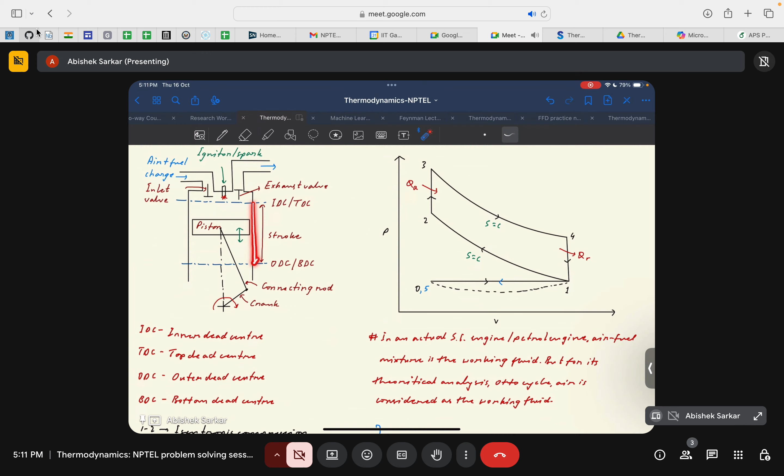And the piston usually travels between these two centers, that is between the inner dead center and the outer dead center. The piston's to and fro motion is limited between these two points. And the distance between which this piston moves, between the inner dead center and outer dead center, is known as the stroke of the piston.

I hope the schematic diagram of the engine is clear. Should I repeat it, or is there any doubt in this diagram?

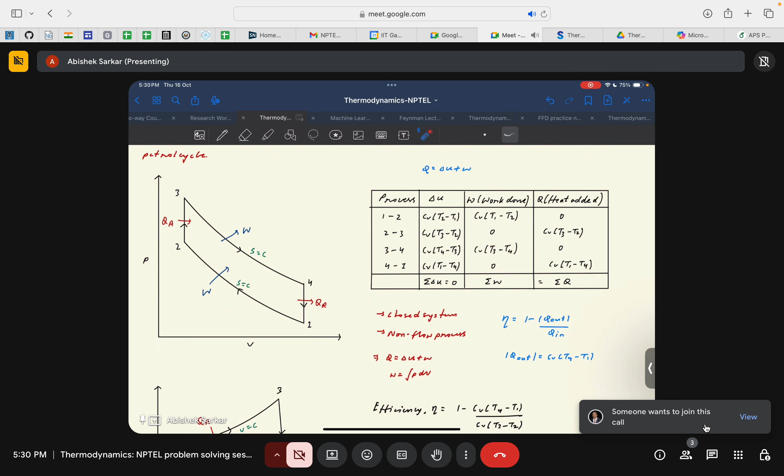Now if you just see, the summation of the change in internal energy, delta U, for all these processes will be equal to 0, and the summation of work done will be equal to the summation of the heat interaction. This is because this is a thermodynamic cycle.

So now we look at how to find the efficiency of this Otto cycle. If you recall, we again take the aid of the general formula of efficiency.

So we take the general formula, that is eta equals 1 minus Q out by Q in. Q out is the magnitude of the heat rejected. I think you already know this, so I don't have to dive deep into it again.

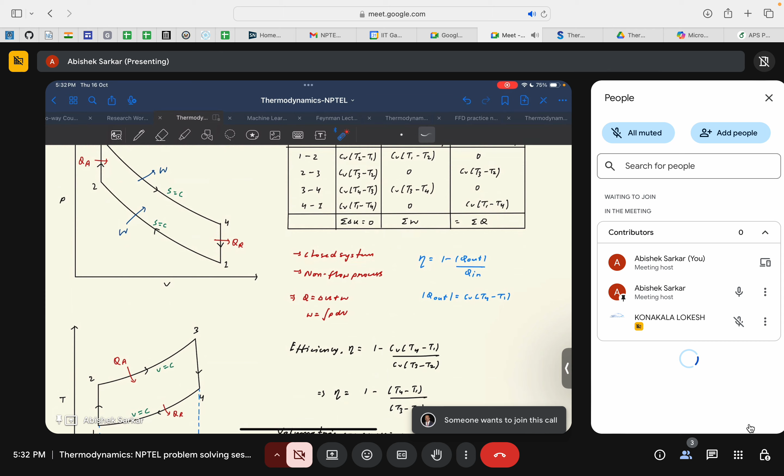So by now you will see that the Q out in this case would be Cv times T1 minus T4. The Q out will be heat rejection, so heat rejection would be Cv times T1 minus T4, and heat addition would be Cv times T3 minus T2.

So here I have written Q rejected to be Cv times T1 minus T4, but this is like the formula of initial minus final. If you just check the magnitude, because T4 is higher than T1, and we are taking the magnitude of the heat rejection, we will take the negative of this, so it becomes Cv times T4 minus T1.

So we will have efficiency eta as 1 minus Cv times T4 minus T1 divided by Cv times T3 minus T2, that is the heat added. Here again T3 is greater than T2, so that's fine. So Cv will get cancelled out, and we'll have eta as 1 minus T4 minus T1 divided by T3 minus T2. So is it clear till now?

Okay, so if you recall, in the previous lecture when we discussed the Brayton cycle, we specified that the efficiency was measured in terms of a parameter known as the pressure ratio, Rp. Similarly, in the case of the Otto cycle, we define the thermal efficiency in terms of a parameter known as the volumetric compression ratio.

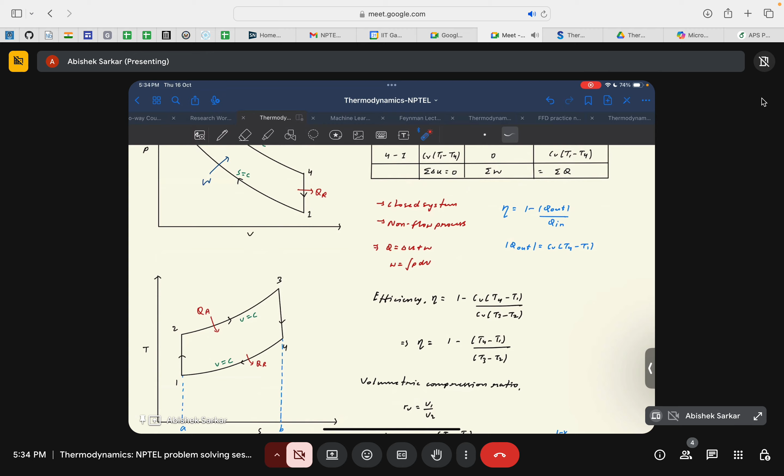As Lokesh rightly pointed out, this is the ratio of the volume at the outer dead center divided by the volume at the inner dead center. So we define RV, the volumetric compression ratio, as V1 divided by V2, where V1 is the volume at the outer dead center and V2 is the volume at the inner dead center.

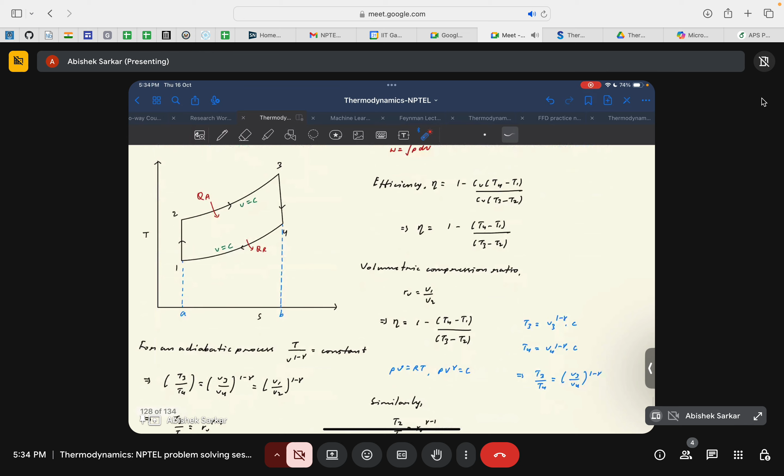And if you see, V1 would be equal to V4, and V2 would be equal to V3, because both these heat interaction processes are constant volume processes. So we define this volumetric compression ratio like this. Now our task is to define eta, or efficiency, in terms of RV.

For that, I think we need to do some manipulation with these temperatures. For adiabatic processes, we know that T by V to the power 1 minus gamma is constant. I know you already know how to derive this, but let me do it this one time; for other processes you can do it yourself. Starting from PV to the power gamma equals constant, which is the PV relation for an adiabatic process...

We do the same thing here, but since we are taking air as an ideal gas in an air standard cycle, we know PV equals RT. So P equals RT by V. If you substitute P here in this expression, you get RT V to the power gamma minus 1, because there is V to the power gamma divided by V, so it becomes V to the power gamma minus 1, equal to C.

Now since R, the specific gas constant, is a constant, we can write TV to the power gamma minus 1 is equal to constant, taking C by R as another constant. So from that we can write T divided by V to the power 1 minus gamma is equal to constant.

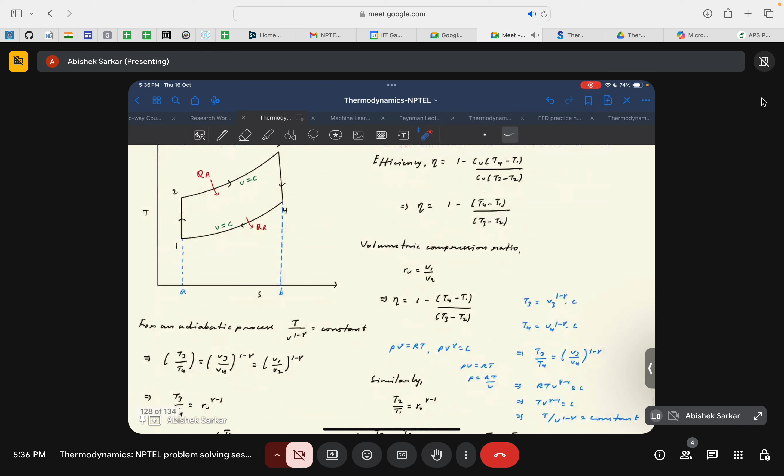With this, we can write T3 by T4 equals V3 by V4 to the power 1 minus gamma, or V1 by V2 to the power 1 minus gamma. Why? Because V1 is equal to V4 and V2 is equal to V3. So from that we can write V3 by V4 is equal to V1 by V2, to the power 1 minus gamma.

No, I think there is a mistake here. Just let me clarify one thing, I made a mistake, so I will correct it. T3 by V3 to the power 1 minus gamma would be equal to T4 by V4 to the power 1 minus gamma, or T3 by T4 would be equal to V3 by V4 to the power 1 minus gamma. I think it was correct only.

So it should be V2 by V1, then it would make sense. Yeah, now it's fine. Since T3 by T4 is equal to V3 by V4, V3 by V4 now would be equal to 1 by RV, correct?

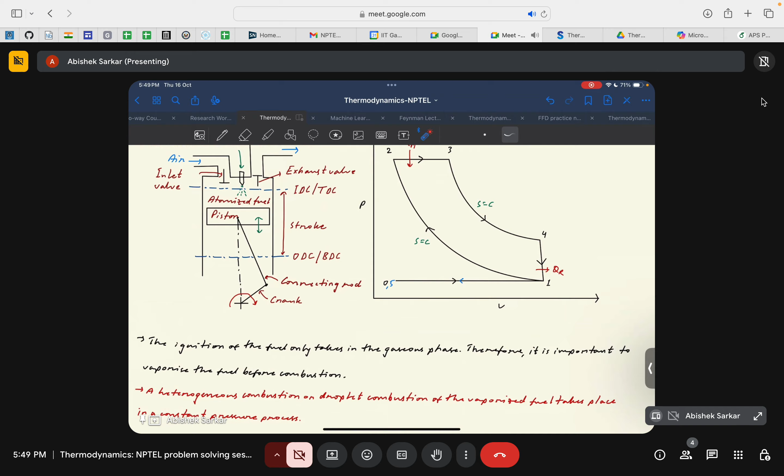So you see, similar to the Otto cycle, this is also a 4 stroke engine. But again, as I mentioned, there is a 2 stroke variant as well, but we will not discuss it here - you can read about it in the textbooks. For vehicles, in most cases, it is the 4 stroke engine that is much more applicable.

So is this cycle clear? The description of this schematic presentation and the PV diagram, is it clear?

Yes, sir. Okay, thank you.

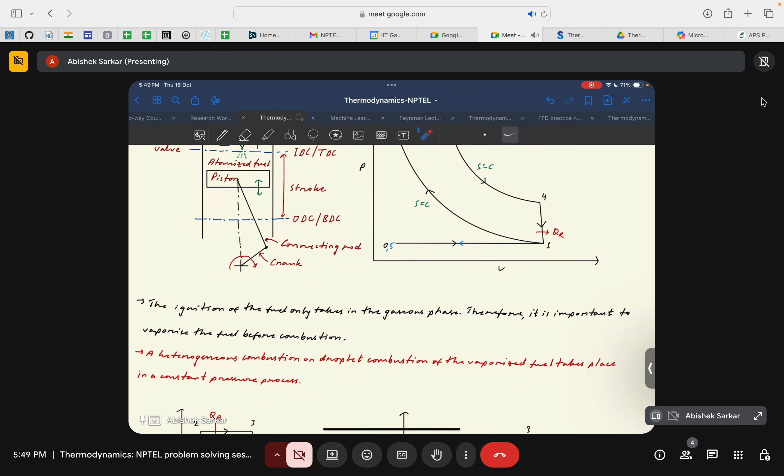As I mentioned, in the case of this diesel cycle, it's a heterogeneous combustion or droplet combustion, so it takes place in a constant pressure manner.

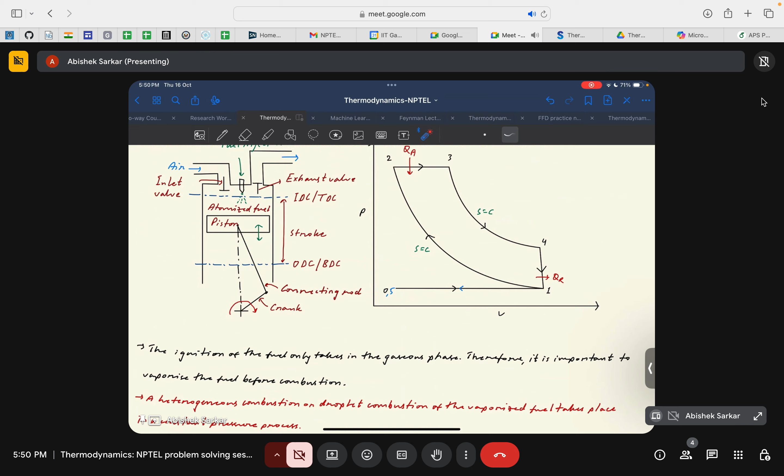Similar to the Otto cycle, since this is an actual cycle, from a thermodynamics perspective we need to look at it as a closed cycle. It's actually an open cycle - air comes in and combustion products move out, a continuous inflow and outflow. But for the air standard version, we remove this continuous flow part so we can approximate it as an air standard cycle. This is the air standard variant of the same cycle.

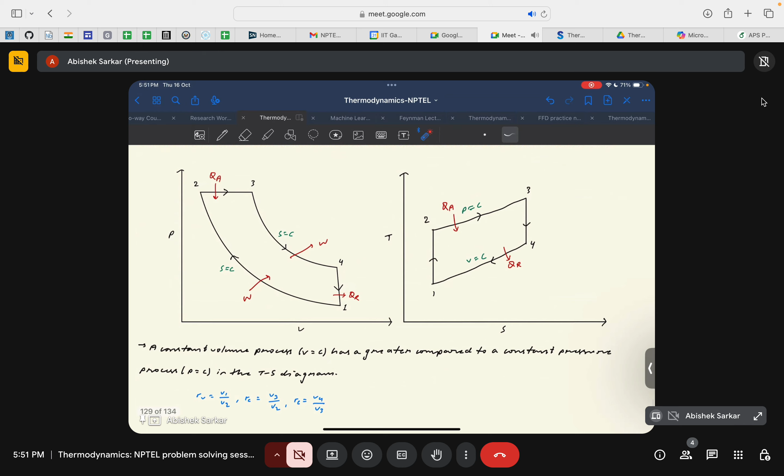Similar to before, this cycle is already known so I won't repeat it, but this is the corresponding TS diagram for this PV diagram. Process 1 to 2 is an isentropic compression, so because of compression the pressure and temperature both go up.

The distinction is that the heat addition process, due to combustion of the fuel, is a constant pressure process rather than a constant volume one. Process 2 to 3 is a constant pressure process, so temperature goes up but pressure remains constant, and volume also goes up.

Process 3 to 4 is isentropic expansion, and because of the expansion both the pressure and temperature go down.

Process 4 to 1 is a constant volume heat rejection, and because of the heat rejection again the temperature and pressure both go down.

Now if you see here, the slope of the constant pressure curve and the constant volume curve are different. In the case of the Otto cycle they would have been similar, but in the diesel cycle the slope of the constant pressure line is lower compared to the slope of the constant volume line in the TS diagram. We have discussed this again and again throughout the course.

This becomes much clearer when discussing the diesel cycle, since it has both constant volume and constant pressure lines, so these two lines have to be drawn differently. Conceptually, if anybody checks your answer sheet, when they see your diesel cycle diagram, they will check whether you have drawn the slope of the constant pressure and constant volume lines differently or not. This is important in that respect.

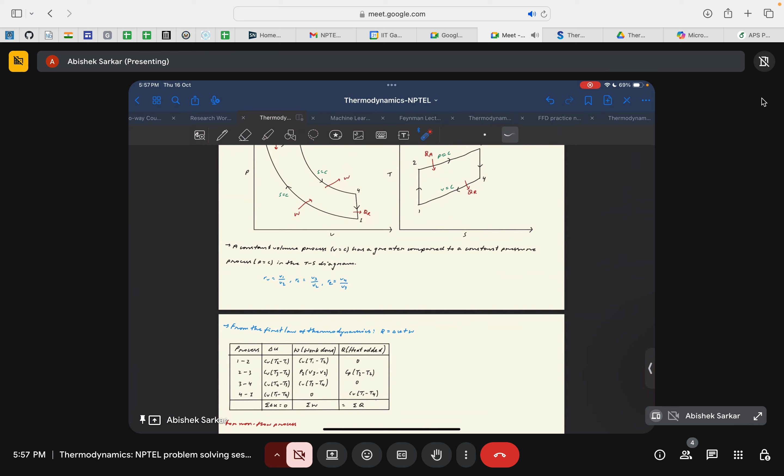Again, if you just sum up the total change in internal energy, you will get it to be equal to 0, and the summation of work and heat would be equal to each other, because this is a thermodynamic cycle, a closed thermodynamic cycle. So I hope this discussion was clear. If there is any doubt, you can ask, otherwise I will proceed.

Okay, now for this part it's quite understandable. I think I can start with here itself.

Efficiency, or eta, in the case of this real cycle is again similar to the generic expression for efficiency. So it will be 1 minus Q out by Q in. The magnitude of Q out, we need to take the magnitude of the heat rejection. So Q out would be Cv times T4 minus T1, and Q in would be Cp times T3 minus T2. In the case of the Otto cycle, both were Cv, so these two would cancel out, but in this case, since it is a constant pressure heat addition, it is Cp. Now we know that Cp by Cv is equal to gamma, that is the specific heat ratio. So we will have eta as 1 minus T4 minus T1 divided by gamma times T3 minus T2.

So I will again just define the ratios. Volumetric compression ratio RV is V1 divided by V2. Cutoff ratio RC is V3 by V2, and expansion ratio RE is V4 by V3.

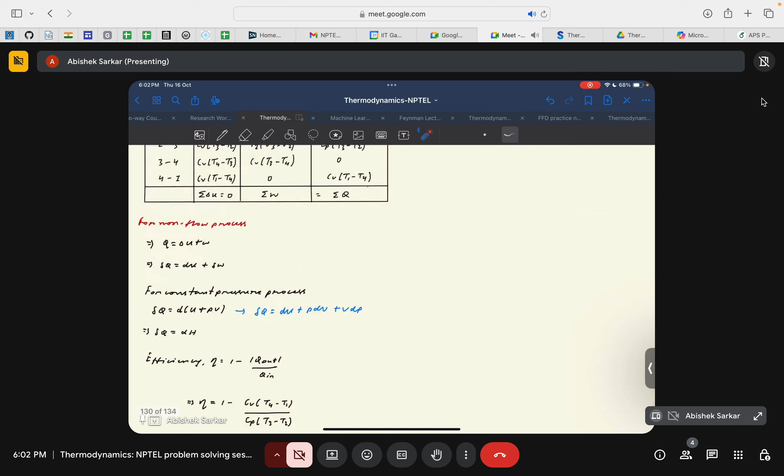If I go back here, since V3 will always be greater than V2 - because in this process only the fuel is being injected, that's why V3 has to be greater than V2 - this will always give you a cutoff ratio greater than 1.

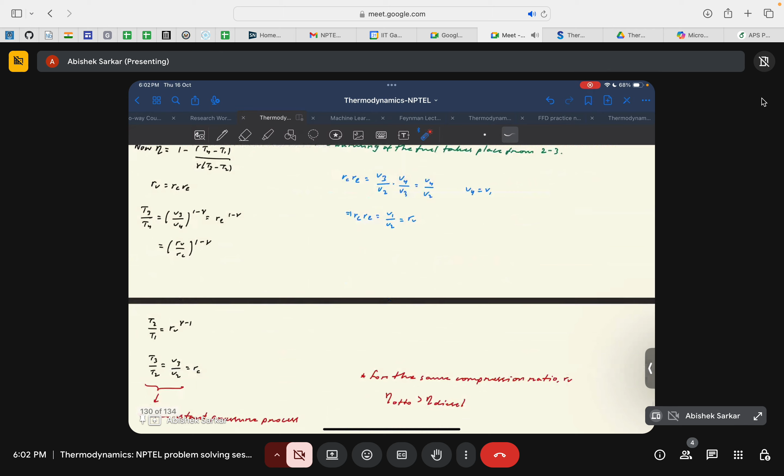And since RC is always greater than 1, you will find that this factor is always greater than 1. And if this factor is greater than 1, then this component multiplied by something greater than 1 will give you eta to be lower than the case when it was just substituted by it.

So I will just give an example, I think it's quite understandable. Like, see initially, if 1 by RV to the power gamma minus 1 is equal to 0.4.

Now if this ratio, this factor, is say equal to 2, then eta Otto would be equal to 1 minus 0.4. But eta diesel would be equal to 1 minus 0.4 times 2, that is 1 minus 0.8 or 0.2, so it will be 0.6... wait, it will be 0.2.

So the key takeaway from this argument is that for the same compression ratio, or volumetric compression ratio, the efficiency of the Otto cycle is always greater than the efficiency of the diesel cycle. This is a key takeaway from this argument.

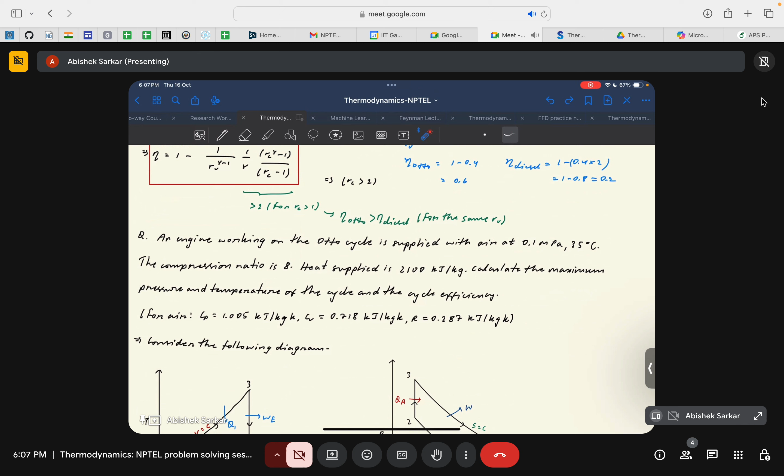So there is one example. Let me take the first example, the example for the Otto cycle. Let us all focus together, and then there's another example for diesel cycle that I will give you some time to try, and then after that I think that would be all. So let us take this example.

An engine working on the Otto cycle is supplied by air at initial conditions of 0.1 megapascal and 35 degrees Celsius. These are the inlet conditions for the air. The compression ratio is 8, RV is equal to 8. Heat supplied is 2100 kilojoule per kg. Heat supplied would be this heat addition, the heat generated after combustion. Calculate the maximum pressure and temperature of the cycle and the cycle efficiency.

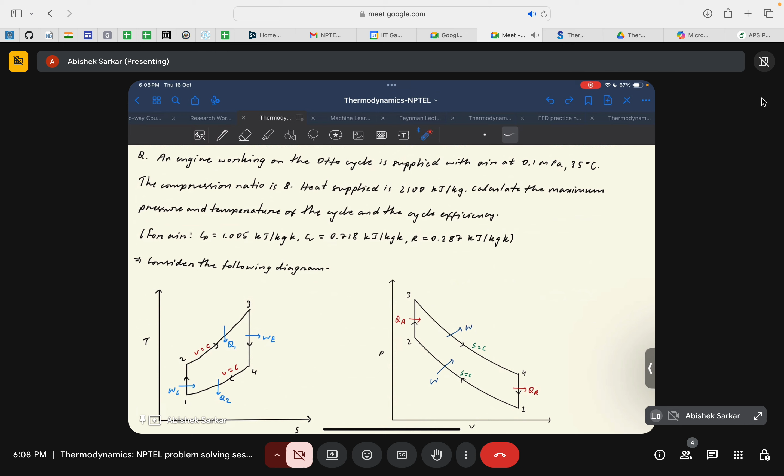One thing to note is that depending upon your notation, in this case according to my notation, point 3 is the point of highest pressure and temperature, because it is the point after the combustion or after the heat addition process. You will see from the TS diagram the temperature is highest, and from the PV diagram the pressure is also highest. So they are asking to find the maximum pressure and temperature of the cycle, that would be T3 and P3, and the cycle efficiency.

The parameters are given: Cp is 1.005 kilojoule per kg Kelvin, Cv is 0.718 kilojoule per kg Kelvin, and the specific gas constant for air is 0.287 kilojoule per kg Kelvin.

A good practice for all these cases is to draw both the TS diagram and the PV diagram, but most of the times PV diagram is enough. But if you do not do the TS diagram, sometimes you may get confused which would be the point of highest temperature, but usually it is always the point after the heat addition process, at least for this Otto cycle and diesel cycle.

So we have T1, the initial temperature is 35 degrees Celsius or 308 Kelvin. I won't say it's not only a good practice, but an important practice to convert all the temperature to the Kelvin scale when dealing with basic thermodynamic questions. So it's just a general practice, convert the temperature to the absolute temperature scale, the Kelvin scale.

Pressure is 0.1 megapascal. You can also write it as 100 kilopascal, to just make your calculations much more simpler.

Q1 or heat addition is 2100 kilojoule per kg, and volumetric compression ratio is 8. Since we already have RV, we can easily find the efficiency of the cycle. Eta cycle is 1 minus 1 by RV to the power gamma minus 1, or 1 minus 1 divided by 8 to the power 0.4. Gamma is 1.4, so 1.4 minus 1 is 0.4. So we'll get eta cycle to be 0.565, or 56.5%.

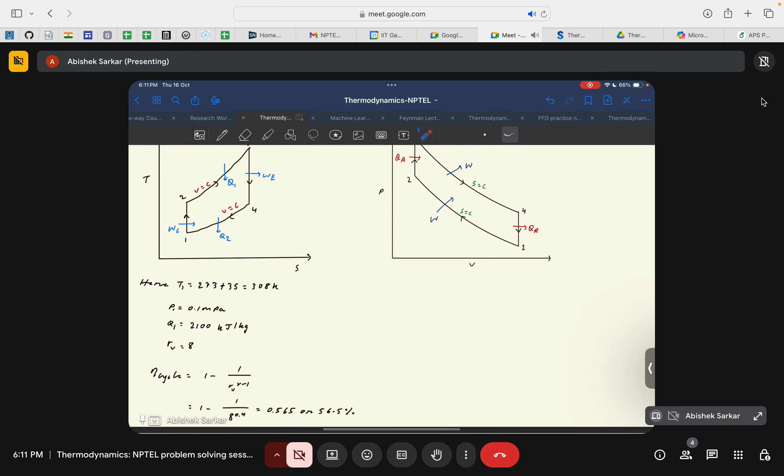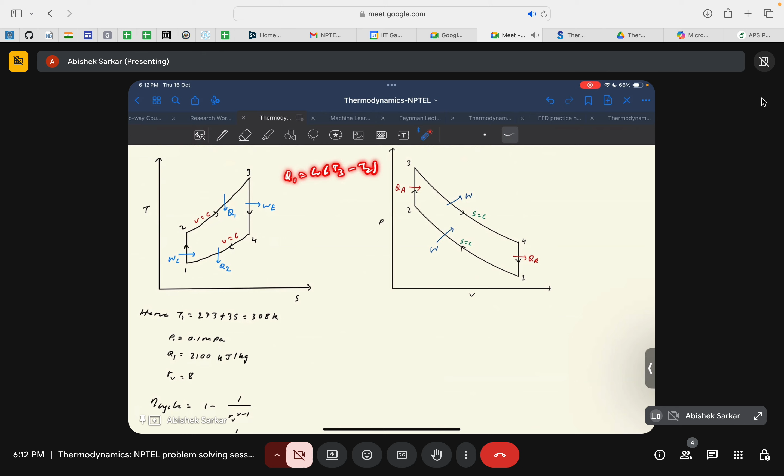Now since you know T2, and more importantly you also know Q1, that is the heat addition. Q1 would be, if you see here, it's a constant volume heat addition, so Q1 would be CV times T3 minus T2. You know it is equal to 2100 kilojoule per kg. Since you know CV, since you know T2, you can easily find T3. So T3 minus T2 would be 2100 divided by 0.718, or to be equal to 2925 Kelvin, or T3 would be equal to 2925 plus 708.4, so T3, which is T max, would be equal to 3633 Kelvin. So you got the maximum temperature of the cycle.

So they have asked you to find the maximum pressure as well. For that you need to take the aid of this relation: P2 by P1 equal to V1 by V2 to the power gamma. This came from PV to the power gamma is constant, so P1 V1 to the power gamma is equal to P2 V2 to the power gamma, or we will have P2 by P1 to be equal to V1 by V2 to the power gamma.

From that you know V1 by V2 is 8, the volumetric compression ratio. So we have P2 by P1 to be equal to 8 to the power 1.4, or P2 by P1 is 18.37. P1 was 0.1 megapascal, if you recall. So P2 would be 18.37 times 0.1, or 1.837 megapascal. Is it alright till now?

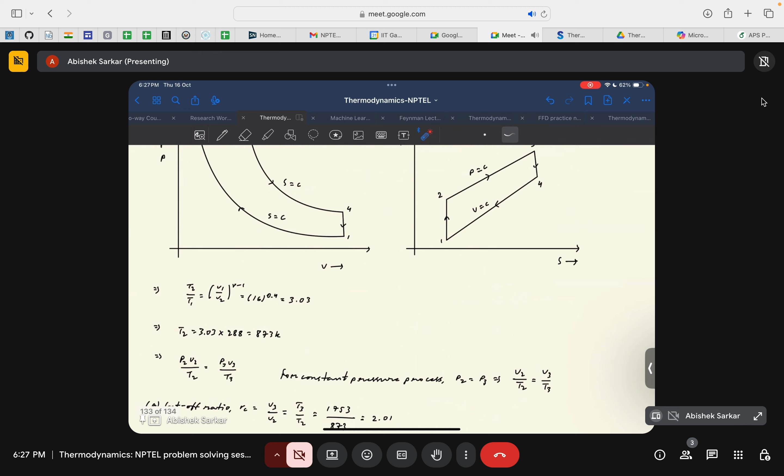T3 by T4, that is this process, T3 by T4 would be equal to V4 by V3 to the power gamma minus 1, similar to this relation. So V4 by V3 can be written as, since V4 equal to V1, we can write this equal to V1 by V3, just write it somewhere. This we can write as V1 by V2 times V2 by V3, or V1 by V2 divided by V3 by V2.

So we'll get V1 by V2 is RV, the compression ratio, and V3 by V2 is RC, the cutoff ratio. Both of them you already know. So from that you can write T3 by T4 to be 16, the volumetric compression ratio, divided by RC, the cutoff ratio, that is 2.01, to the power 1.4 minus 1, or 0.4. You will get T3 by T4 is 2.29, or T4 would be 1753 divided by 2.29, or 766 Kelvin.

Now heat rejection Q2 would be CV times T4 minus T1, correct? T1 you already know because it's a constant volume heat rejection. So T4 is 766 Kelvin and T1 is 288 Kelvin from the initial condition. So we'll get Q2 to be 0.718 times 766 minus 288, that is equal to 343.2 kilojoule per kg.

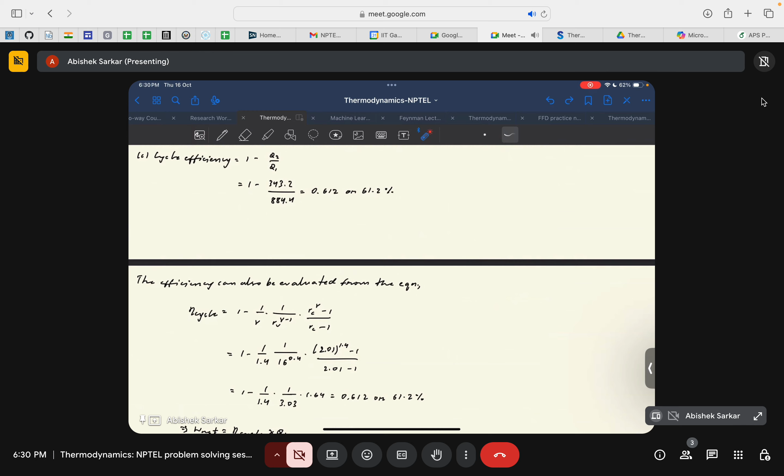Let me go step by step. RV to the power gamma minus 1 is 16 to the power 0.4, that is 3.03. RC is 2.01, so this factor becomes equal to 1.64. This factor is greater than 1, right? 1.64 divided by 1.4 is greater than 1, because 1.64 is greater than 1.4, so this factor becomes greater than 1. That's why you get the efficiency as 0.612, or 61.2%.

Let me just point it out: if the compression ratio of the Otto cycle would have been 16, then the efficiency of the Otto cycle would have been greater than 61.2%. But as I mentioned, in general the compression ratio of the diesel cycle is always greater than the compression ratio of the Otto cycle. That's why the efficiency of this diesel cycle, in this general random case given in the question, is greater than the efficiency of the Otto cycle. It is 61.2 here; in the case of the Otto cycle it was 56.5%, if I'm not wrong.

Okay, so the final part was the mean effective pressure. In this case, the mean effective pressure is the ratio of the net work output of the cycle divided by the stroke volume of the piston. So this gives the mean effective pressure.